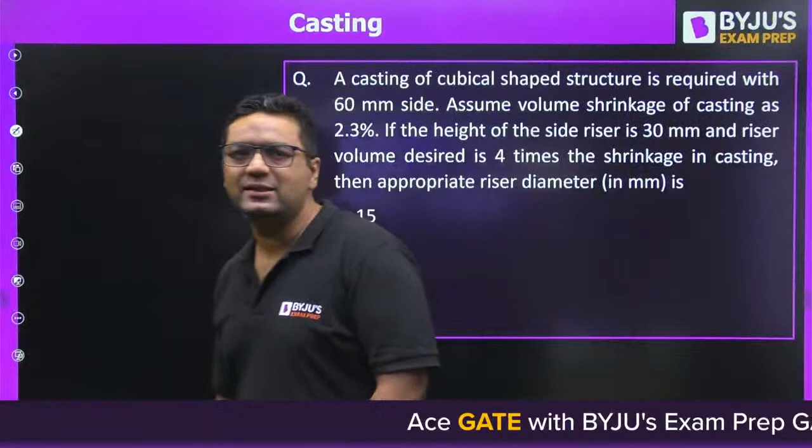So guys, this is the very first question in front of you from metal casting.

First of all, I would like to tell you what topics questions are asked from. In metal casting, questions come from riser design, gating system design, gating ratio, slush casting, centrifugal casting. All these are the topics from which numericals are framed. Otherwise for theory, there is no limit - you can have many theory questions possible.

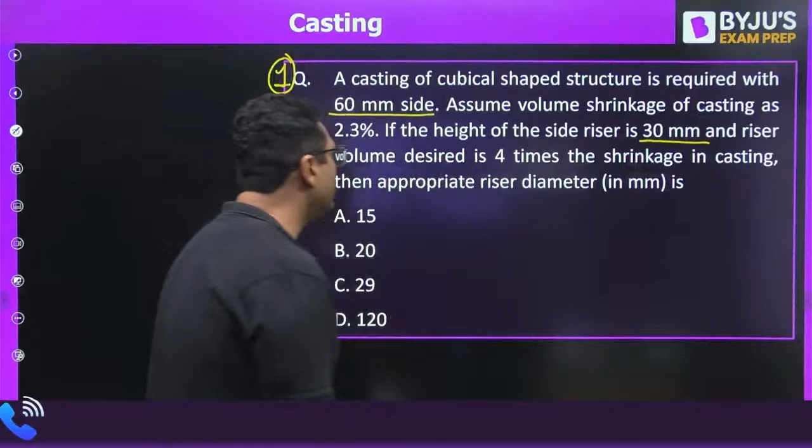So we are taking these numericals. A casting of cubical shape structure is required with 60 mm side - this is the size of casting. Assume volume shrinkage of casting as 2.3%. If the height of the side riser is 30 mm and riser volume is 4 times the shrinkage volume, then find out the appropriate riser diameter.

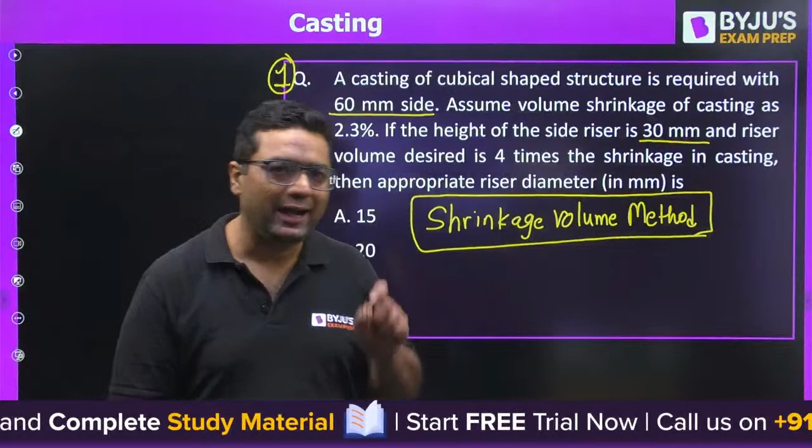So if you see this question, this is from the shrinkage volume method. If you remember, there are many methods for riser design - we have Caine's method, Chvorinov's method, shrinkage volume method. We also have some other methods like the modulus method. So out of these, this is the shrinkage volume method. And nowadays, if you see recent GATE papers, they are asking from either this, or also from one more method, the shape factor method. So for recent GATE, these are important topics.

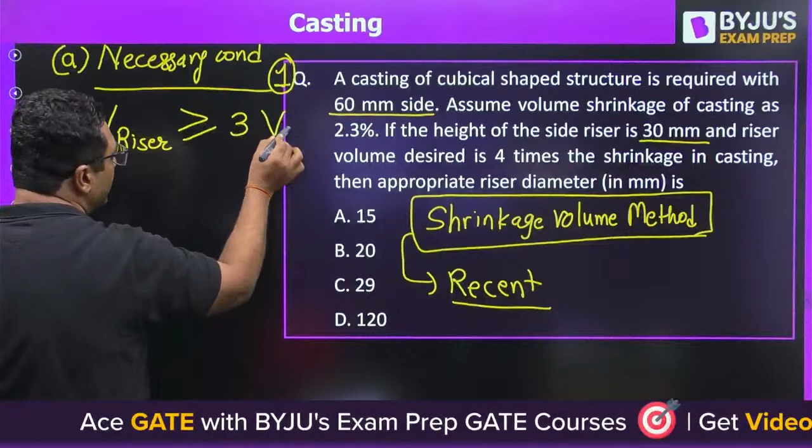So here we have two conditions. First condition is the necessary condition, for which they have given you something. We will say that the volume of riser is going to be more than or equal to 3 times the shrinkage volume. But here they have given 4 times, and 4 is more than 3, so that condition is satisfied.

So first of all, we need to find out the volume of casting. Since the casting is of cubical shape, it is going to be 60 cube. And if you want to find out the shrinkage volume, they have given what the shrinkage volume is.

Shrinkage volume is given as 2.3%, my dear. So you will say it is 2.3 divided by 100 into 60 cube. When you find out the shrinkage volume, I have calculated it as 4968 mm cube.

4968 mm cube. Now the necessary condition says the volume of riser, pi by 4 d square h, that should be more than or equal to, for our case it is not 3, it is 4. So it is going to be 4 into 4968. When you put this value, you will get the diameter because height is given in the question.

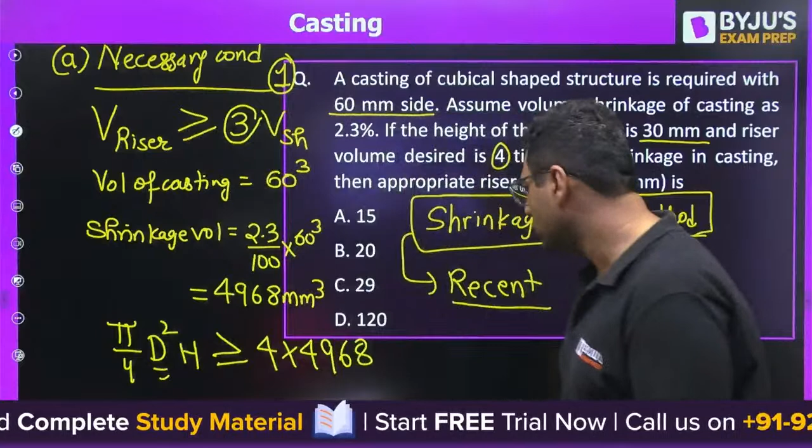Kiran has already solved it, 28.34 is the answer. So Kiran is saying answer is C. Good evening Kiran, so for the first question you are saying the answer to be C. Okay, let us see. So from here you will be getting, as you are saying, 28.34.

But I feel, Kiran, you forgot that we are also going to check with the sufficient condition. So you need to check with the sufficient condition. What is the sufficient condition? Sufficient condition is the modulus of riser should be more than or equal to the modulus of casting.

So when we talk about the modulus of riser, it is volume by surface area of riser should be more than or equal to volume by surface area of casting. So when you go for this, Kiran, tell me are you getting the same answer or will the answer change? You know volume of the riser is pi by 4 d square h. When we talk about surface area, it is pi by 4 d square.

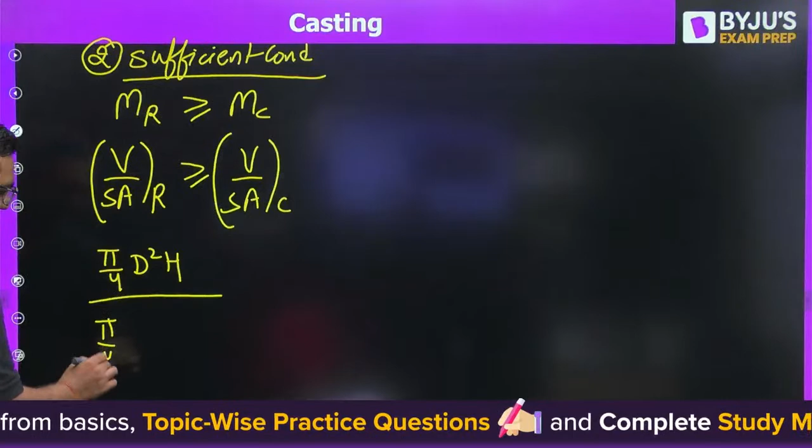Have they mentioned which type of riser it is? They are saying assume, okay is required. They are just saying the side riser. So for the side riser, we will be having 2 times pi by 4 d square plus pi d h. Height is given to us, and when you equate this with a cube by 6a square.

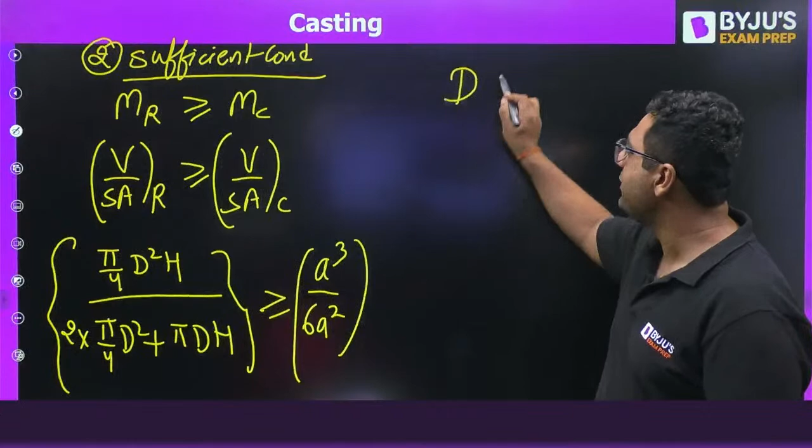Yes, very good, side is given to us. This time you will be getting diameter more than or equal to what? I feel it will be coming 120 mm. So you will be getting the answer to be 120 mm.

So yes, you know the sufficient condition requires 120. So if sufficient condition is saying 120 and the desired is saying 28, the answer is going to be 120, because both the conditions must be satisfied. So very good, Kiran, the answer for this question will be D.

Moving to the next question, guys. This is from slush casting. On slush casting, till date, questions have not been asked in the paper. So we have chances that a question will come this year from slush casting, because they have already asked from centrifugal casting. So the next question will be for slush casting.

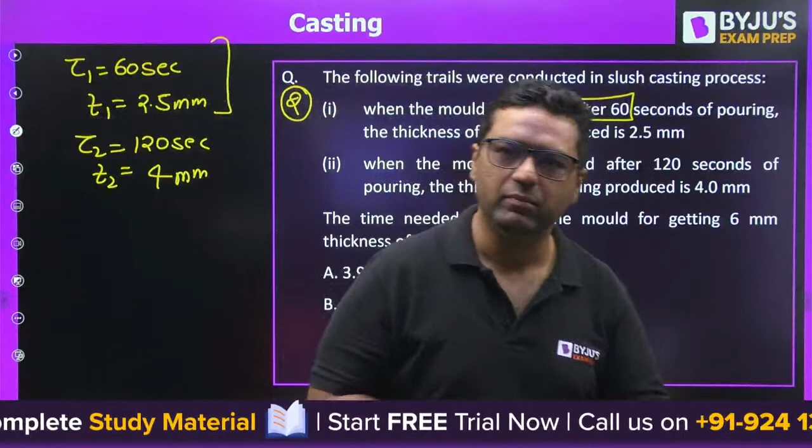So I told you, in slush casting, whenever we go by Chvorinov's law, solidification time is directly proportional to volume by surface area squared. You know volume by surface area is thickness for the thin section, so solidification time is directly proportional to thickness squared.

So you can write the thickness equals C1 square root of solidification time, I am showing it with tau s, plus C2. This is the equation where C1 and C2 are constants. You can also write this equation as T equals C1... here T is the thickness, C2 plus C1 root tau s.

So first of all, you will put the data of the first one. This is 2.5 thickness equals C2 plus C1 square root of 60 seconds. The second equation will be 4 mm thickness equals C2 plus C1 square root of 120 seconds. These two equations will give you C1 and C2.

After that, you put the thickness value into C1 root tau s plus C2. You need to find out the value of time for 6 mm thickness. So try to solve it, guys. Yes Kiran, are you trying this?

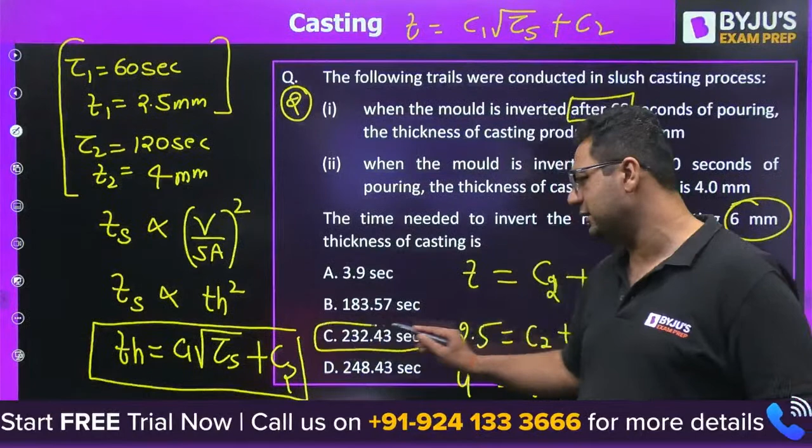Kiran is saying the answer this time is C, 232.43 seconds. I would like to say yes, your answer is correct. When you solve it, you will get C1 value equal to 0.4675, and C2 value equal to minus 1.1213. When you find the time, you will get 232 seconds. So the answer is correct, Kiran. C is the right answer.

Moving to question number 3, guys. This is from permeability number, from the permeability test. I feel you guys would very easily give the answer for this question. A sand specimen is made according to AFS standard and tested using the permeability test. I feel everybody is aware the permeability test is performed by taking a cylindrical specimen of diameter and height equal.

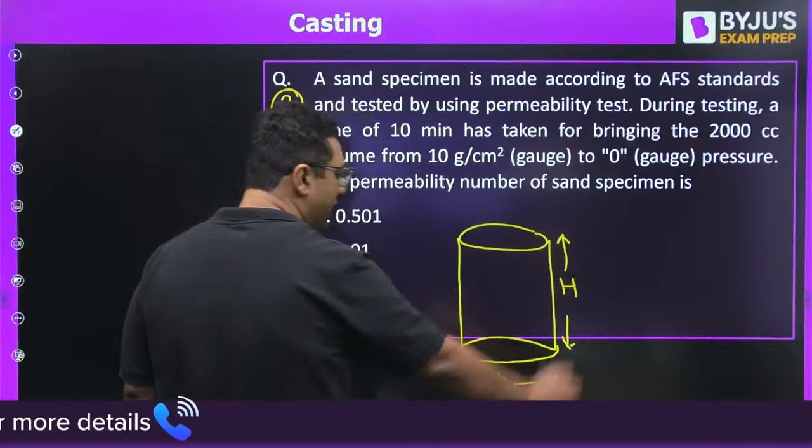Whenever we have this diameter and height equal, you allow air to flow at some pressure difference, and then you find the time required for the flow, because that gives you the proper idea of the permeability number. Is it clear, guys? Yes.

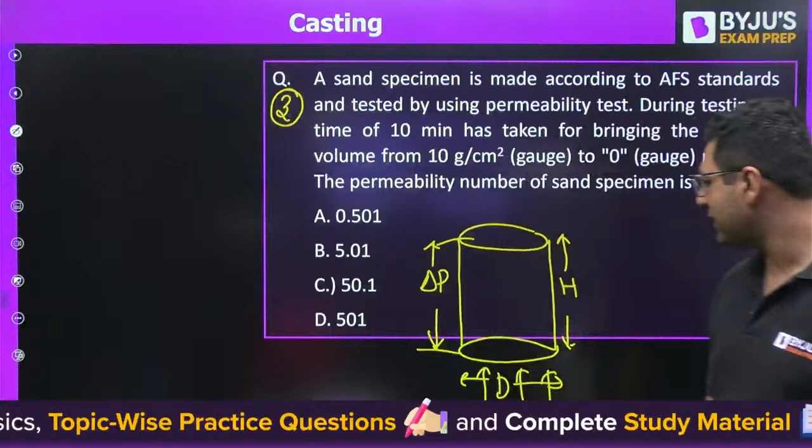Please solve this question, Kiran, I am expecting you will give the answer. They have given all the data. During testing, a time of 10 minutes was taken for bringing 2000 cubic centimeter of air. So volume of air is 2000 cubic centimeter, pressure difference is 10 gram per centimeter square. We need to find out the permeability number.

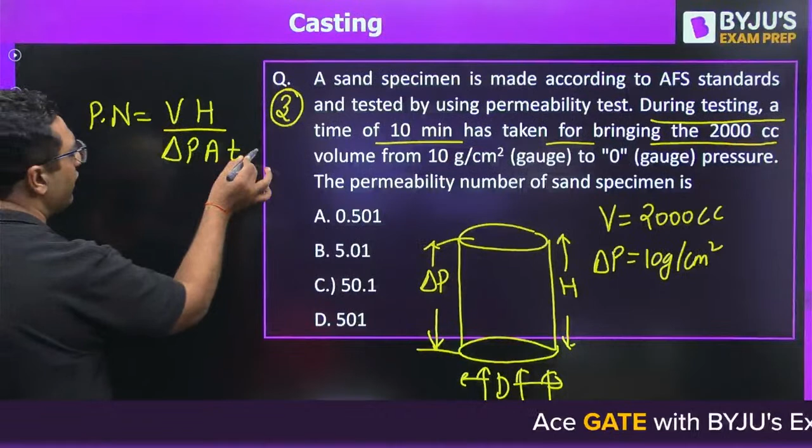The formula for permeability number is VH by delta P into A into T, where TF is the time required to fill the cavity. The diameter and height are 5.08 centimeters, so you can put the value directly because H and area will be found out from this value. So, volume of air is 2000, into height 5.08, divided by delta P 10, into area pi by 4 times 5.08 square, into time 10 minutes. You will get the answer.

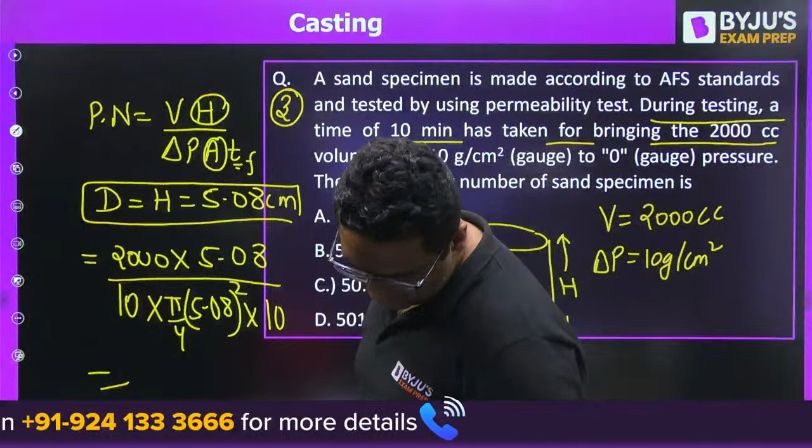Kiran is saying the answer is 5.01, and yes, I feel the answer is correct. 5.0127 is correct, you will get the answer to be 5.0127.

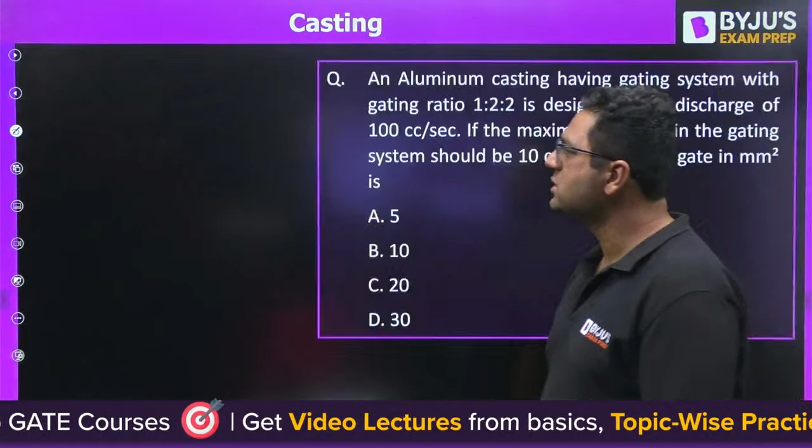So guys, my target is to take all the questions of different types. So you can see the first was on shrinkage volume method, second question was on slush casting, third question is on permeability number, so that you get a taste of all the types of questions here. So guys, we completed 3 questions. Today also we have 10 questions like yesterday we had.

Now question number 4 is in front of you. An aluminium casting - this is from gating ratio, using the concept of gating ratio and also the gating system design. So this is going to use two concepts simultaneously. This question says that an aluminium casting has a gating system with gating ratio. You know what is gating ratio - sprue area, runner area, in-gate area.

1:2:2 is designed for a discharge of 100 - discharge means A into V - 100 cubic centimeter per second. Maximum velocity in the gating system should be... so V maximum is given as 10 centimeter per second.

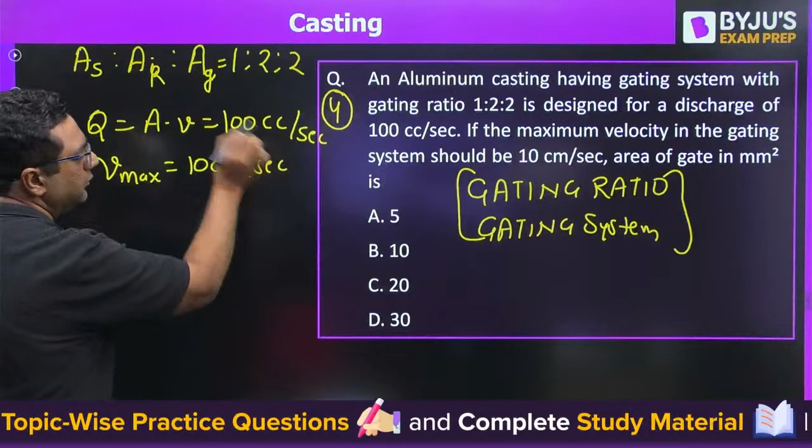You need to find out the area of the gate. It seems to be a very easy question, but let us see if you are able to give the answer. Okay, Kiran has given the answer as 20.

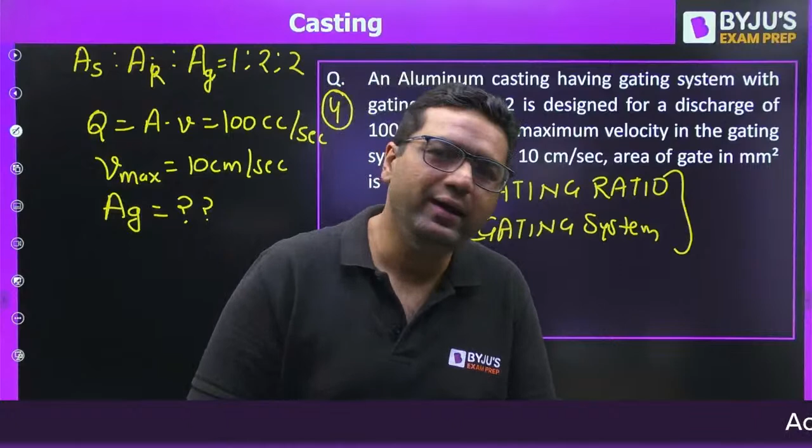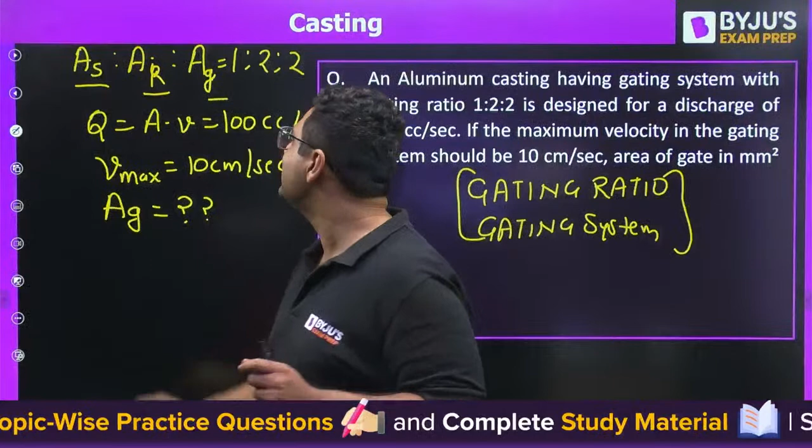And let us solve this question. So when we are talking about this question, the first challenge is to find out where the velocity will be maximum, whether at the sprue, at the runner, or at the in-gate. So my dear, you can see the area is minimum here. As the flow rate A into V is going to remain the same throughout, whatever comes out from the sprue, the same will go to the runner, the same will come from the in-gate. As all that flow rate is the same, it's very much fine that you will have maximum velocity for minimum area. So we are having minimum area at the sprue.

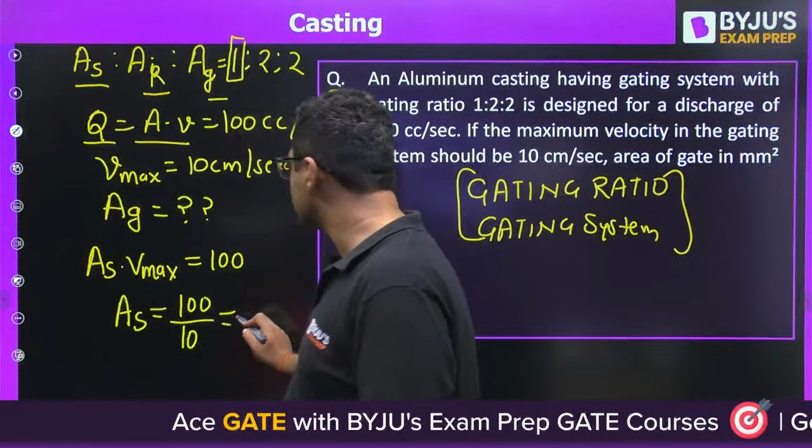So my dear, area of sprue into maximum velocity, that is 100. So you would be having the area of sprue as 100 divided by 10, which is 10 centimeter square. Then the area of in-gate will be 2 times the sprue area. Why? Because this is from the gating ratio. So the answer comes out to be 20. So 20 is the correct answer.

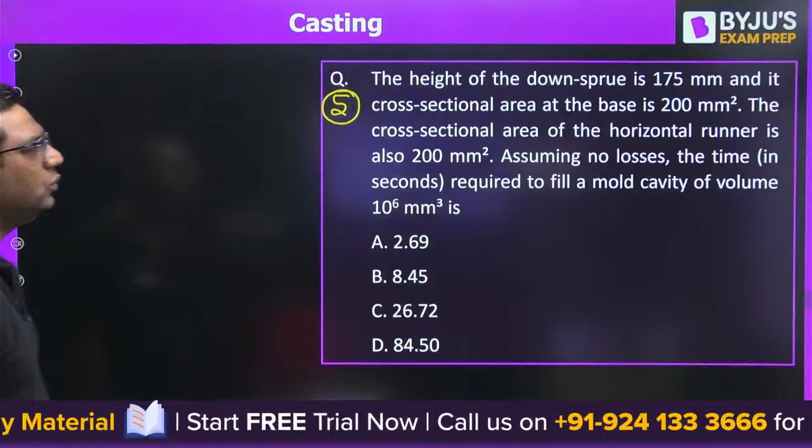Very good, dear. Moving to the next question, question number 5. So my dear, if you see, this question is related to the time required to fill the cavity from top and bottom gating system.

The height of the down sprue is 175, down sprue height is H1, 175 mm. And cross-sectional area at the base, meaning in-gate area, is 200 mm square. The cross-sectional area of the horizontal runner is also 200 mm square, but that is not required. Assume no loss. The time required to fill the cavity needs to be calculated, and the volume of the casting is 10 to the power 6 mm cube.

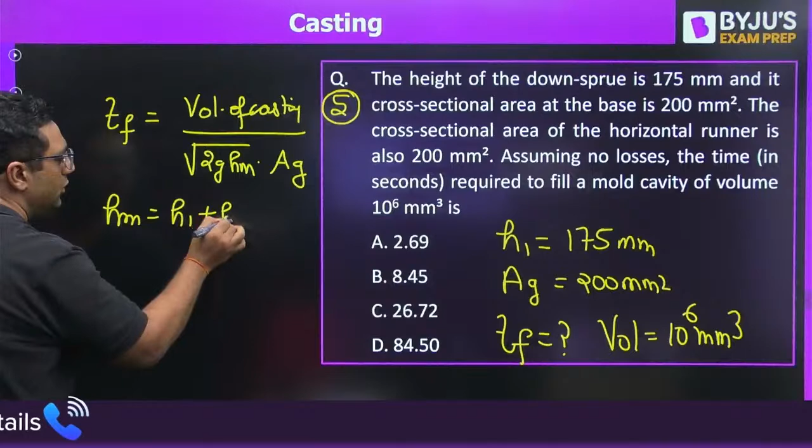It looks like a problem of top gating system as down sprue is given to us. So I feel you guys would be aware of the formula. Time required to fill the cavity by top gating system is volume of casting divided by root 2GHM times area of in-gate, where HM is the height of molten metal. And you know that HM is generally H1 plus H2. Actually it should be just H2 because the height of pouring basin is not given.

So H1 is 0. I feel now you can solve it and find out the time required to fill the cavity by top gating system. So just solve it, guys.

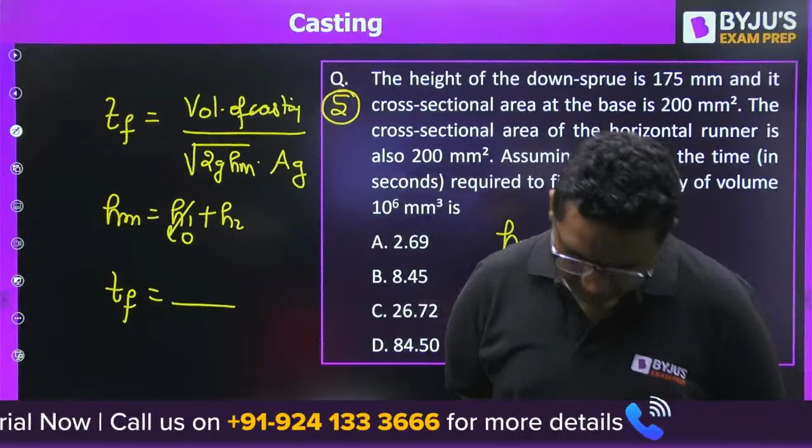Okay, so the answer is given by Kiran as 2.698. So yes, I would say the answer is correct. You will be getting the answer to be 2.698.

Here, the kind of mistake students are making is they are not putting the value of G correctly. If you can see, my dear, the volume is given in mm, 10 to the power 6 mm cube. So here you have area of in-gate as 200 mm square, so you need to put the value of G also in mm. So in mm it is 9810 into 175. You will get the answer to be 2.69. That mistake you need to be aware of.

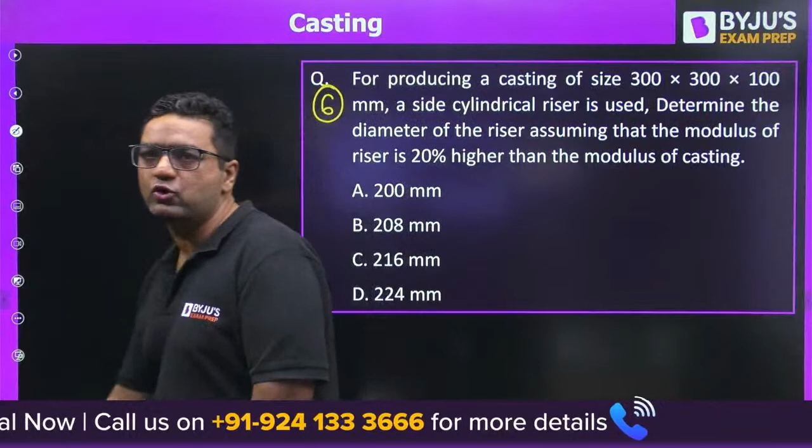For producing a casting of this size, a side cylindrical riser is used. Determine the diameter of the riser assuming the modulus of riser is 20% higher. This is a question of riser design, question of riser design, but by which method? By the modulus method.

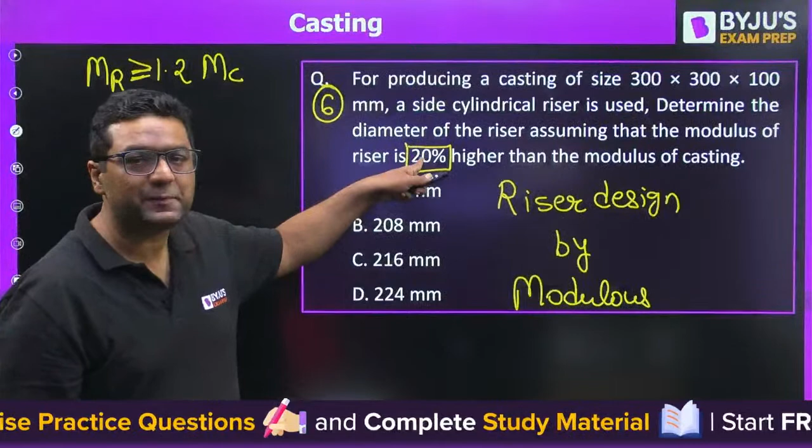So the modulus method says modulus of riser is 1.2 times modulus of casting. It is always more than or equal to. If they do not give this, you will use this only. But if they give 30% here, it will become 1.3. So this is always like this. Modulus of riser is volume of riser over area of riser. It is a side riser, more than or equal to 1.2 times volume of casting over area of casting.

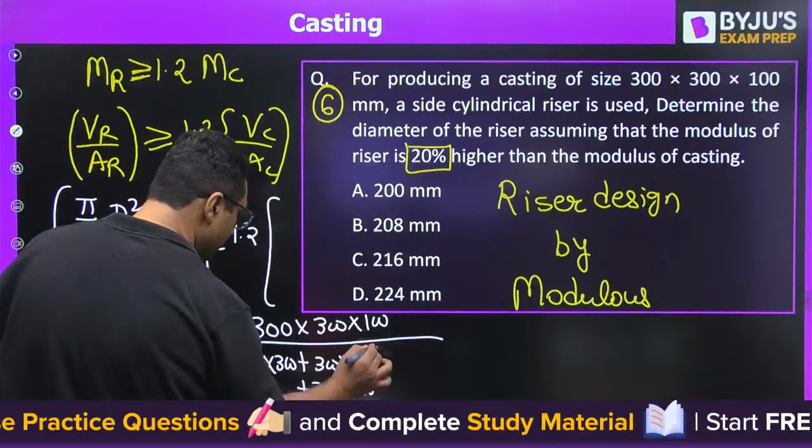So I feel you know that it is going to be... not 4, pi by 4. Pi by 4 d-square h divided by 2 into pi by 4 d-square plus pi d h. This is volume over surface area of riser, and it is 1.2 times. For casting we have 300 cross 300 cross 100 volume, surface area is 300 cross 300, 300 cross 100, 300 cross 100. This you need to do and you will get the answer very easily.

Okay, no issues, Vinit. Now are you fine? Kiran is saying the answer to be C. Okay, 216. Let me check it. So the answer is 216. Very good, C is correct.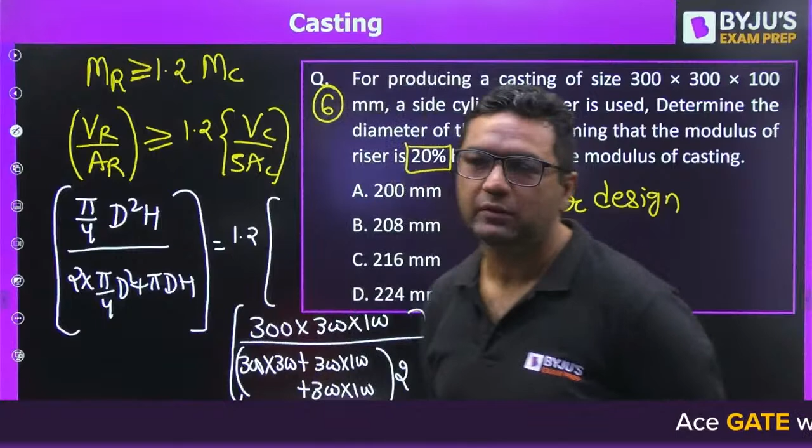So you need to find out the diameter of the riser. Very good, guys. They have mentioned determine the diameter of the riser assuming that the modulus of riser is this. So as it is a side riser, you will take diameter equals to height, because there is no other relation given. So we need to use it and you will get this to be 216 mm.

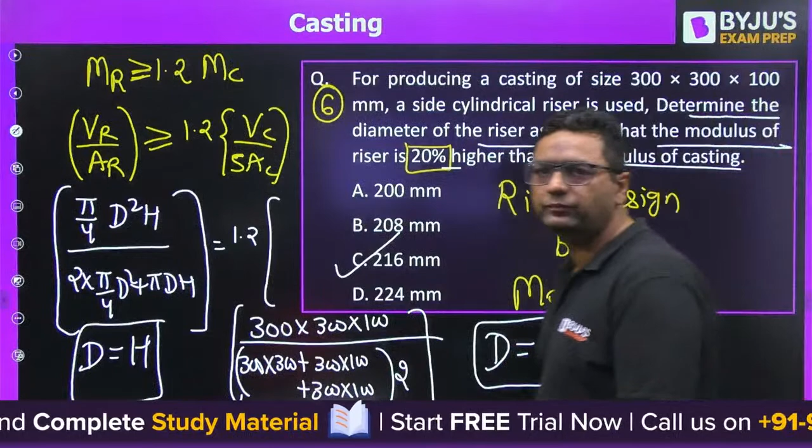Very good. Moving to question number 7. So guys, this 7th question is once again from riser design, but this is from Chvorinov's law. So every question is different. If you see in this session, I am taking all the topics covered with the questions. One topic, one question.

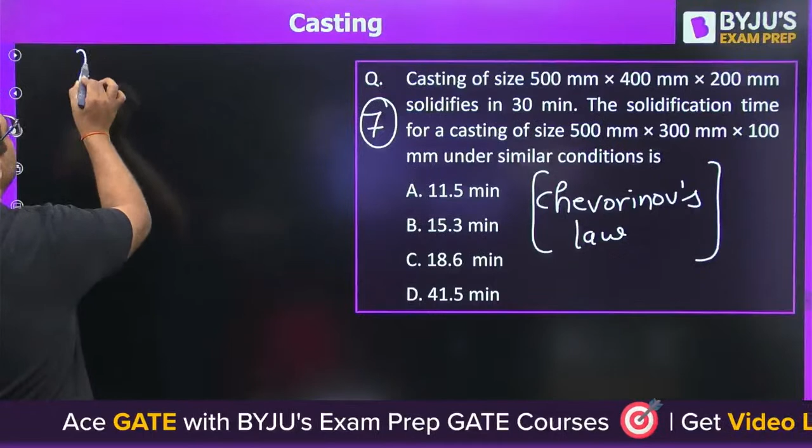Okay, so here we have casting of this size given. So if the casting size is given, you just need to apply this: solidification time of second casting divided by solidification time of first casting is the ratio of volume by surface area of second casting squared, divided by volume by surface area of first casting squared. This is what you need to do, guys.

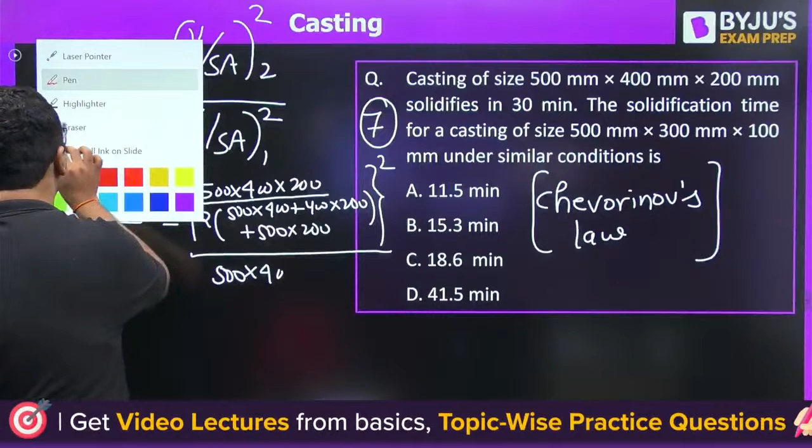So if you see, they have given many data points, TS2 needs to be calculated. TS1 is 30 minutes. Then volume of both the castings is 500 cross 400, 200. Surface area 500 cross 400. You will be having square of this, 500, 300, divided by 2 into... you will be getting the value of TS2.

Only calculations are there. This type of many questions have been asked.

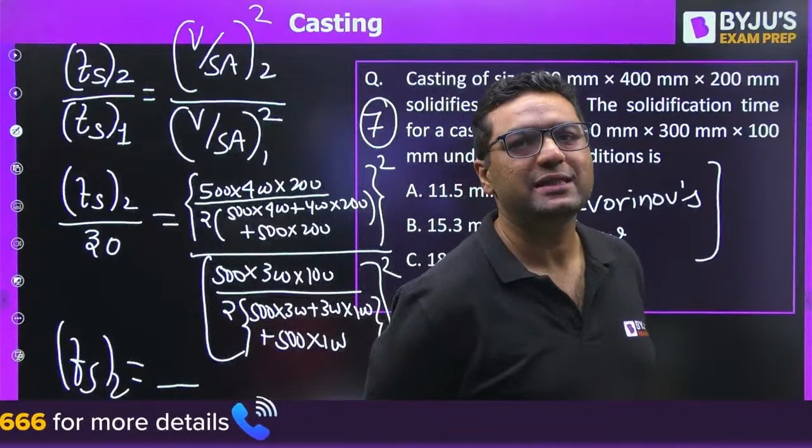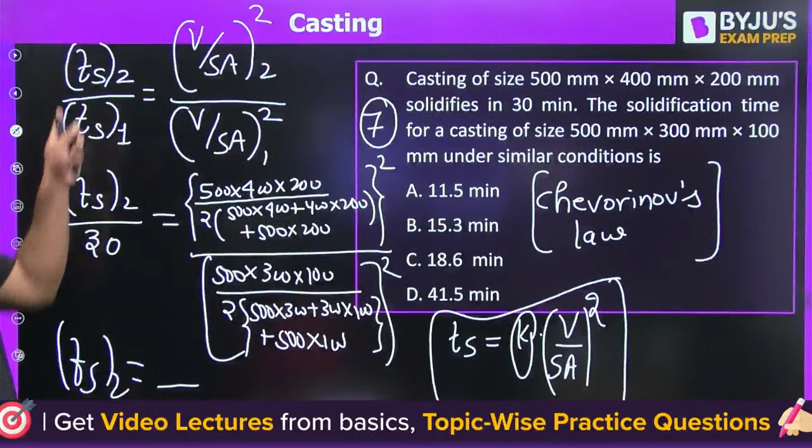Okay. Vineet, this is very simple, no? Solidification time is given as K into V by surface area squared. This is Chvorinov's law. K is the solidification factor, V is the volume, SA is the surface area. And if conditions are same, K will not change. So here for both the cases, conditions are the same. So K will remain the same.

So when you solve it, the answer you will be getting is 11.5 minutes. So Kiran has given the right answer. It is 11.5 minutes.

Moving to question number 8, guys. This is for, my dear, parting line gating system. This is the question on parting line gating system. So all the questions are different, I am not repeating any question.

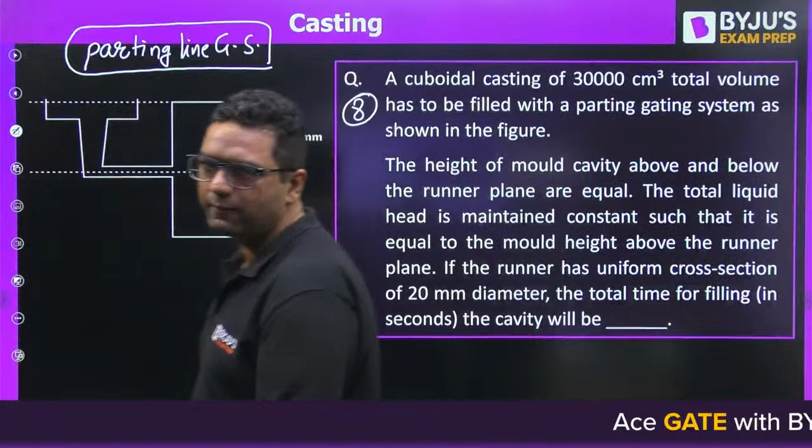Yes, definitely Vineet, it will have been given again. So guys, this is a wonderful question which we are going to do, and this type of question we can expect in the GATE exam. This is question number 8. After this we have 2 more questions.

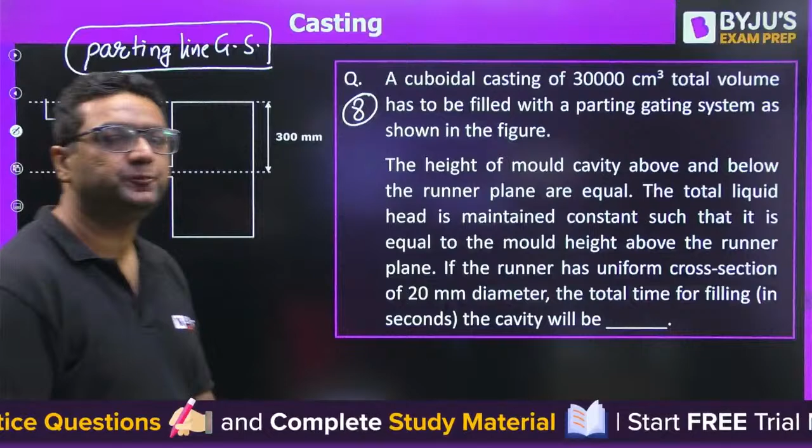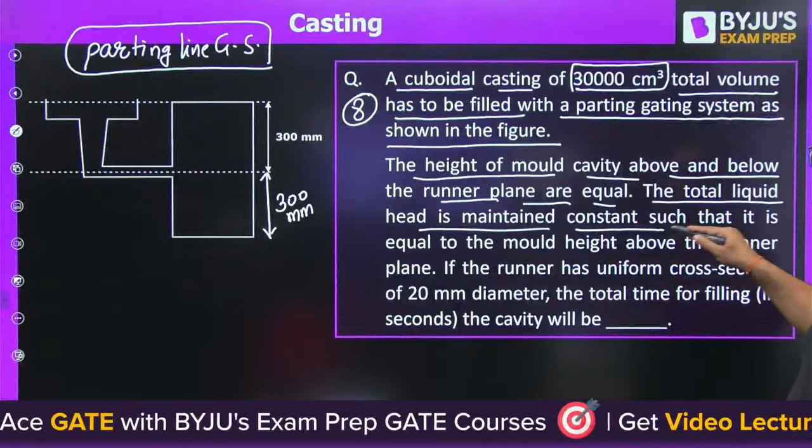I will try to give you one bonus question also. So if you see this question, it says a cuboidal casting of 30,000 cubic centimeters total volume has to be filled with a parting gating system as shown in the figure. The height of the mold cavity above and below the runner plane are equal, so this height and this height are equal. Then the total liquid head is maintained constant such that it is equal to the mold height above the runner, so the height of molten metal is also the same.

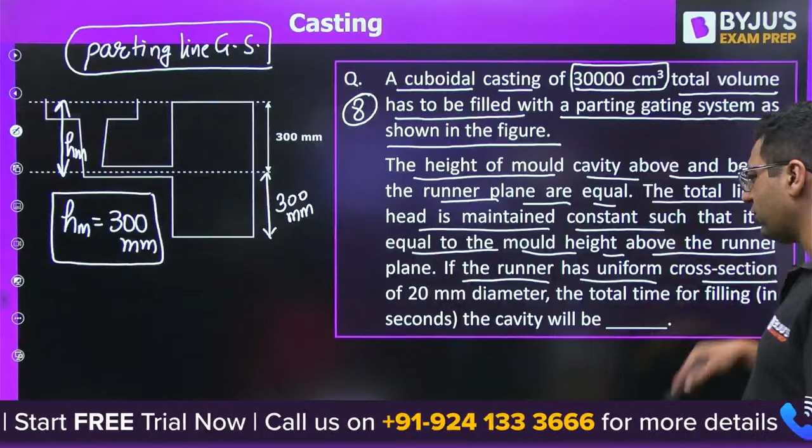Okay, guys. Okay, I feel you have given the answer. Let us see. If the runner has uniform cross section of 20 mm diameter, the total time for filling the cavity is...

Okay, Kiran, let us see.

I would like to tell you guys, these are the 2 parts, A and B. When the molten metal comes inside, B will be filled by the top gating system because molten metal is coming from the top. And A will be filled by the bottom gating system because A is filled from the bottom.

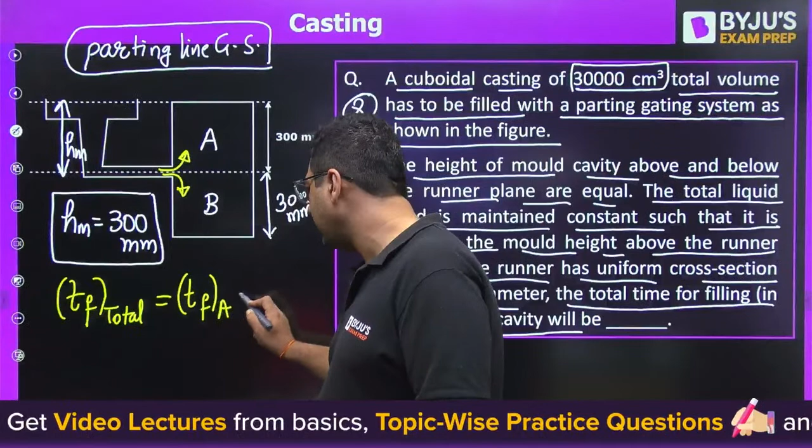So if you want to find the total time required to fill the cavity, it will equal the time required to fill cavity A plus the time required to fill cavity B. For bottom and top gating, formulas are different. But whenever we have the heights to be equal, which heights? This height and this height.

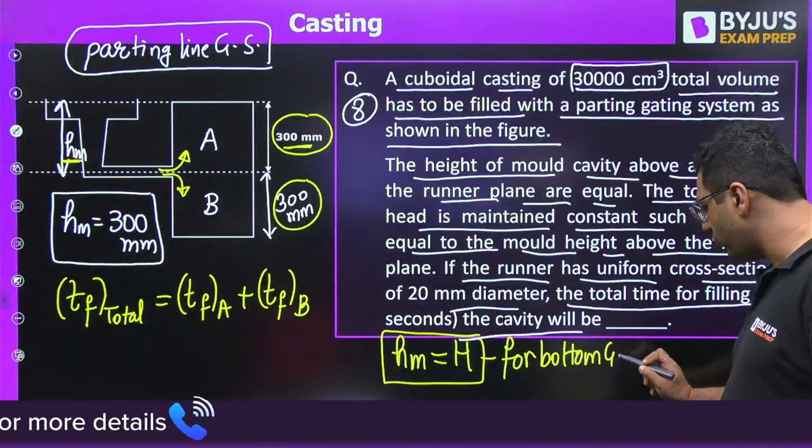If height of molten metal equals the height of cavity for bottom gating system, we are having this height and this height equal. For such cases, the time required to fill the cavity by bottom gating system comes out to be 2 times the time required to fill the cavity by top gating system. Obviously this will be calculated by top gating system, and this will be filled by bottom gating system. But this bottom is going to equal 2 times of top.

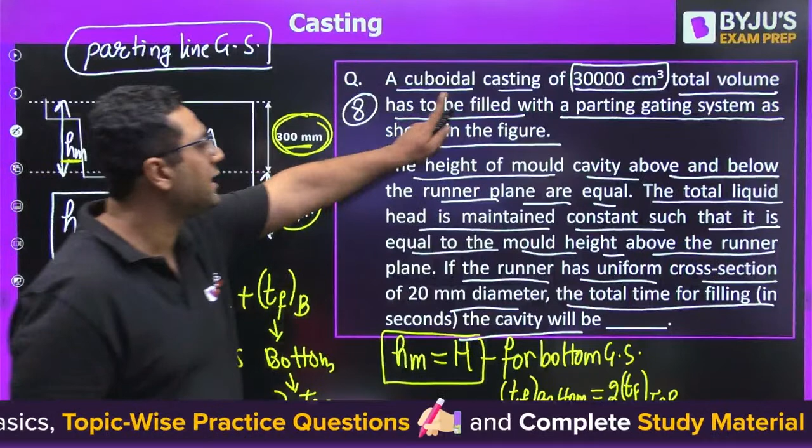If you see, they are saying a cuboidal casting of this total volume has to be filled. Total volume is 30,000 and as heights are equal, you can say 15,000 volume will be here, 15,000 volume will be here. So volumes are equal. So obviously, if you calculate the time required for this cavity, for A you just need to double that.

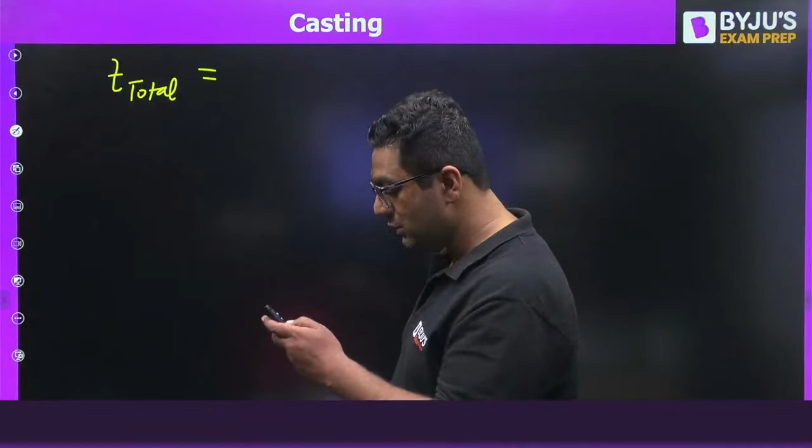So the answer will be coming out to what? The time required to fill the cavity in total equals what? First of all you will say it is 2 times of top here and 1 time of top. Why will they be same? Because the volumes are same for both and the gate area is also same for both, so the velocity of the fluid will also be same for both.

When we go to take this, you can write this directly as we are filling it separately. Let us say TF of B plus 2 times TF of B, it will be 3 times TF of B. So I feel you got the mistake. Now we are going to see it is 3 times.

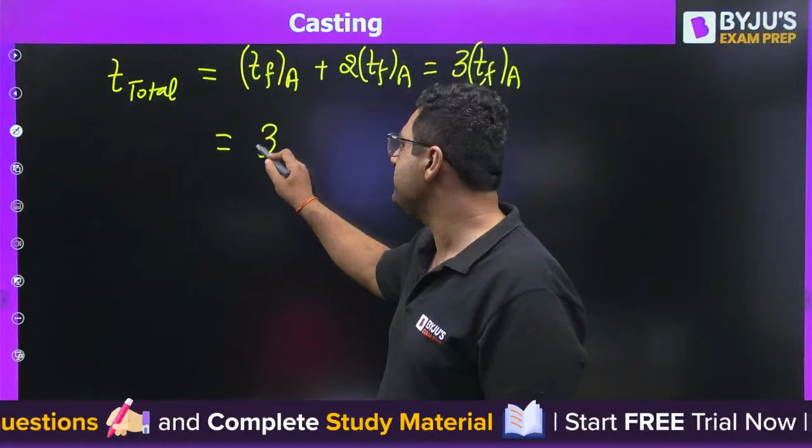This is going to be the volume of the casting, and then it is area of ingate into the velocity. So when you put this value, I feel now you can solve the answer.

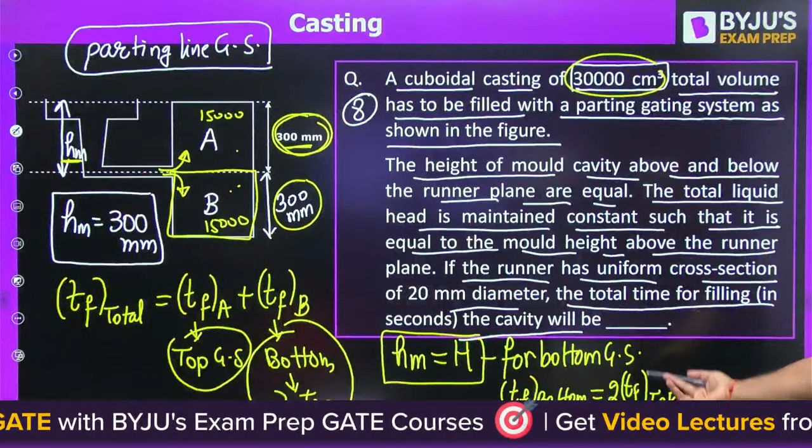They have already mentioned, what is the question? What does the question say? They have given everything. 30,000 total volume has to be filled, and they have given the height. You just need to apply the formula now.

And when you solve it, what will be the answer you get? The answer will be coming out to be what for this? It will be coming out to 59.04. Is it correct? Yes, 59.04 will be the right answer, 59.04 seconds.

Is it clear for everyone, guys? This is question number 8. Moving to question number 9 now.

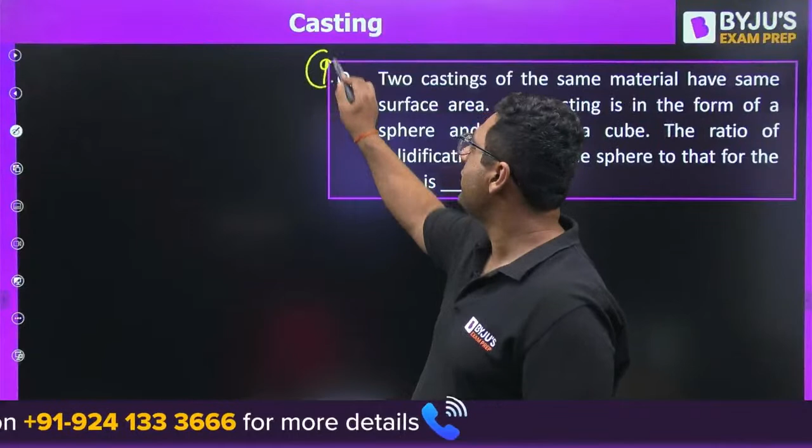2 castings of the same material have the same surface area, so surface area of 1 equals surface area of 2. One casting is in the form of a sphere, the other is in the form of a cube. For sphere, surface area is 4 pi r square. For cube, it is 6a square.

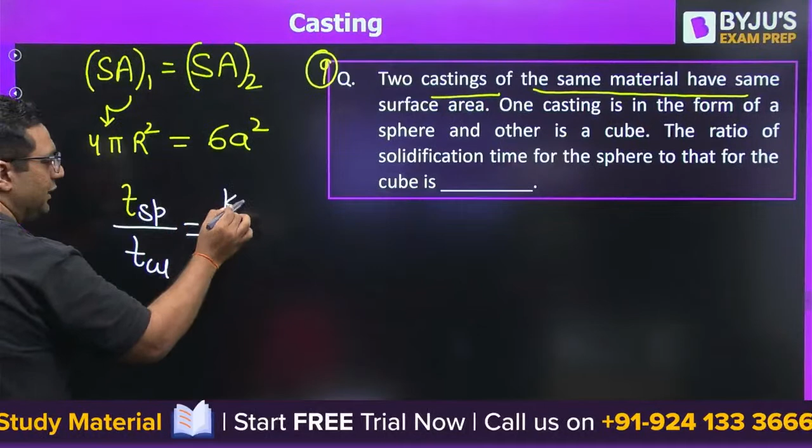Then they are saying the ratio of solidification time for sphere to that of cube. Solidification time of sphere to that of cube is K into volume by surface area of sphere, whole square, over K into volume by surface area of cube, whole square. The K's will get cancelled out. You need to find the ratio, and you are given the radius and everything.

So this ratio is given to us. You just need to say what is volume over volume. Surface areas are given equal, so they will get cancelled out. So volume of sphere is 4 by 3 pi r cube, and volume of cube is a cube. So you know the ratio of r by a from here.

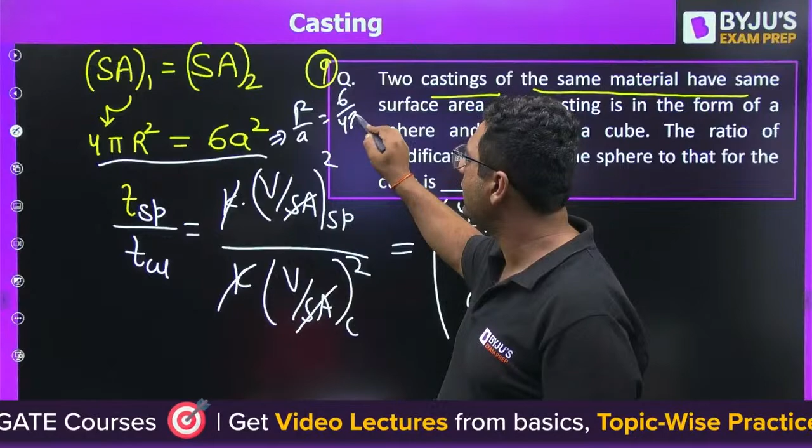You can find r by a equals 6 by 4 pi, so r by a is 6 by 4 pi to the power 1 by 2. You just need to put the value, 4 by 3 pi, obviously squared will be there. 4 by 3 pi, r by a is 6 by 4 pi to the power 1 by 2, and we are going to have power 3 and 2, 6. So you will solve this and get the answer.

So what would be the answer for this question, Kiran? Vineet. After this, we have 2 more questions.

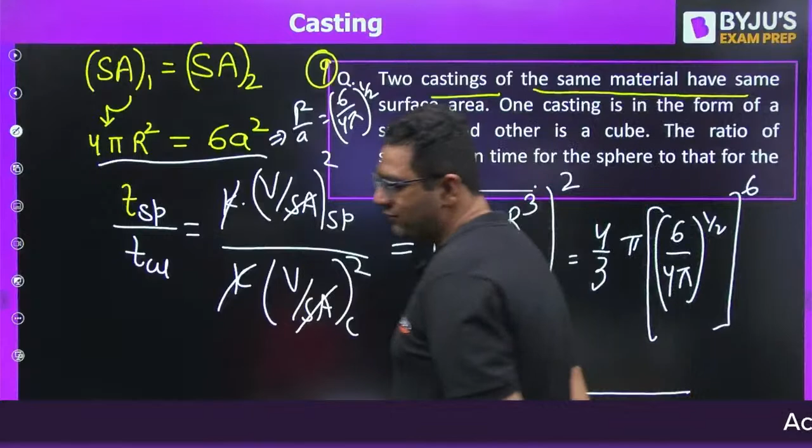Kiran is saying 1.909. 1.909 is the perfectly correct answer. Very good. 1.909, this is the right answer.

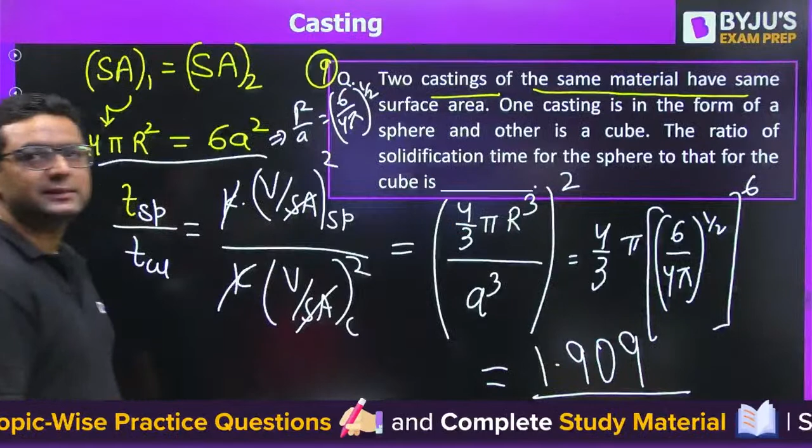So moving ahead. Very good, Vineet. Moving ahead to question number 10.

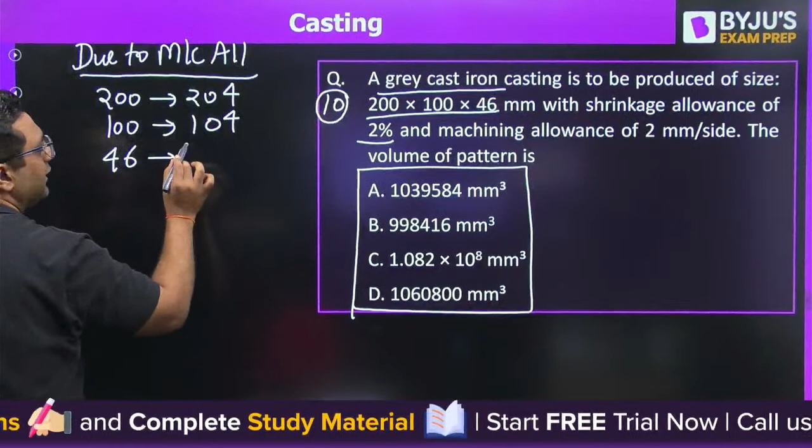The volume of the pattern will be calculated. Due to machining allowance, 200 will become 204, 100 will become 104, 46 will become 50, because on every side you just need to add 2 mm. So this is the desired size because of the machining allowance.

And shrinkage allowance is given as 2%. So generally whenever students see grey cast iron, they feel that the volume of pattern will be smaller than the volume of casting because cast iron shows different behavior. But I would like to say cast iron is not showing that kind of different behavior. Whenever we are talking about cast iron, we are talking about solidification.

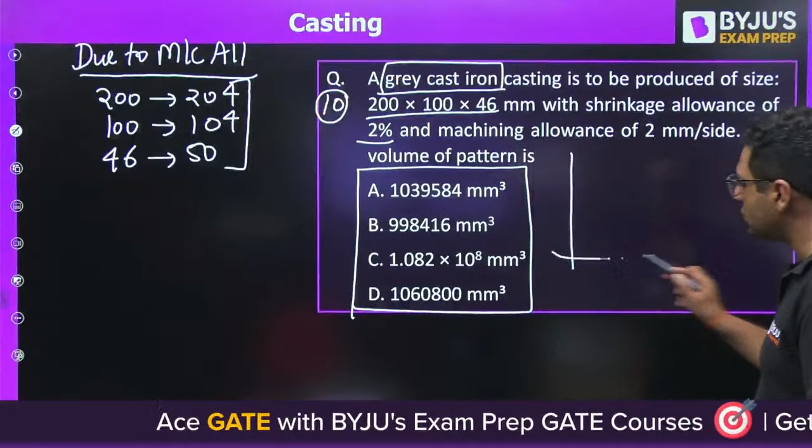This is the cooling curve. For this stage, this is called liquid shrinkage, this is solidification shrinkage, and this is solid shrinkage. Allowance is provided for this third stage, where grey cast iron shows the same behavior as other materials. But in this other phase, cast iron shows different behavior - it expands.

So when we are talking about shrinkage allowance, this is not going to be affected. This will be affected for the riser design. In grey cast iron, you may not require a riser because whatever shrinks, the same amount of expansion happens.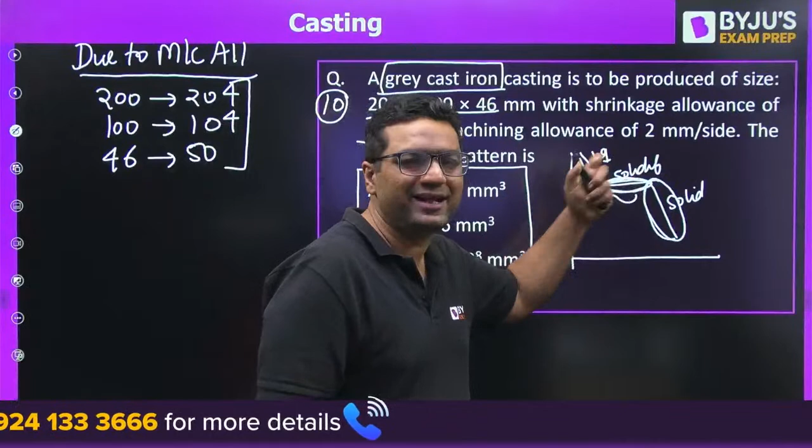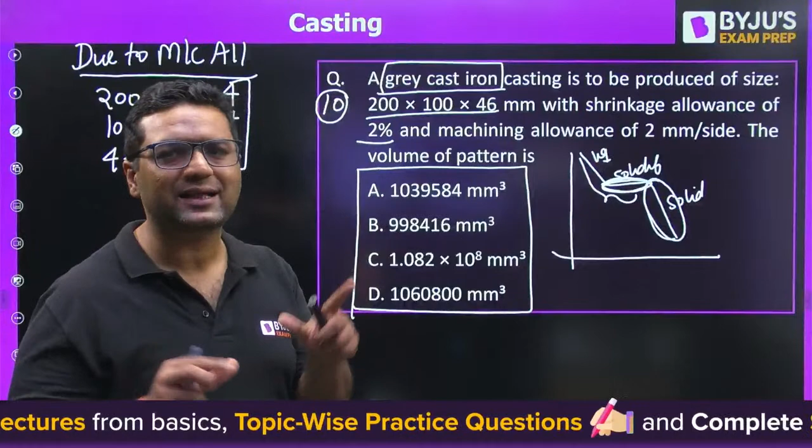There's a question Varun is asking: sir, which one is better, MTech in design or MS in IIT Delhi Mechanical? Please inform more about MS in Mechanical at IIT Delhi. Obviously, when we are talking about MS and MTech, I have taken a video where I clearly told you in 5 minutes the difference between MS and MTech. Go for that video, or I will share it in my Telegram channel after this class. It's available on the same channel, there in 5 minutes I explained the difference. But otherwise, students generally prefer MTech rather than MS because MS is slightly more time consuming, it is more research based. So you can watch that session. But if you have the same option, MTech in design is always better than MS, design is better than MS. But it should be the same college, I am telling you.

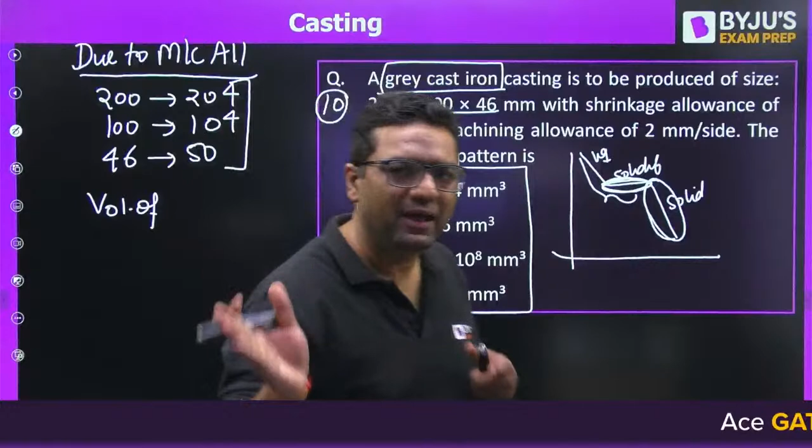So guys, when you will solve this, you will find volume of pattern. So grey cast iron also shows the same behavior as far as shrinkage allowance is concerned. The behavior is different from the riser point of view, because for these two stages of shrinkage, the riser provides the molten metal.

So when you will say volume of pattern to the volume of casting, when we will find this - the volume of the pattern is what they are asking. So you know that when you are going to talk about the volume of pattern, you will be saying obviously 2%. So this is going to be the size. So you are going to do 1.02 volume of pattern to volume of casting. What will this ratio be? This ratio will be 1.02.

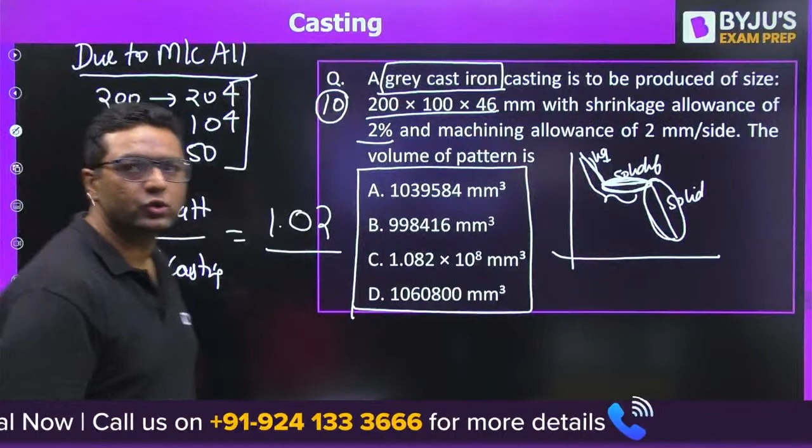So you need to do this, is it clear? So when you will be doing this, you will get the volume of pattern. So for volume of casting, you need to have this size first of all, after that allowance will be provided on these sizes. So when you have 204, that will be multiplied by 1.02, that will give you this size. And then when you find out, you will get the answer to be 1060800. I feel this will be the answer you will get.

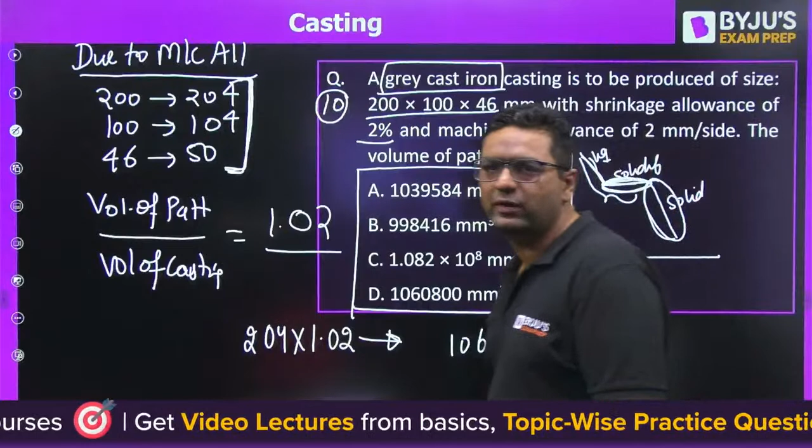Okay, are you getting C or D? Kiran, are you getting C or D? Please tell me that. I am once again telling you if you have any confusion.

This is the size for machining allowance. After that, this 204 needs to be multiplied by 1.02. You will get one size. 104 also like this, 50 also like this. Then you will be getting the answer.

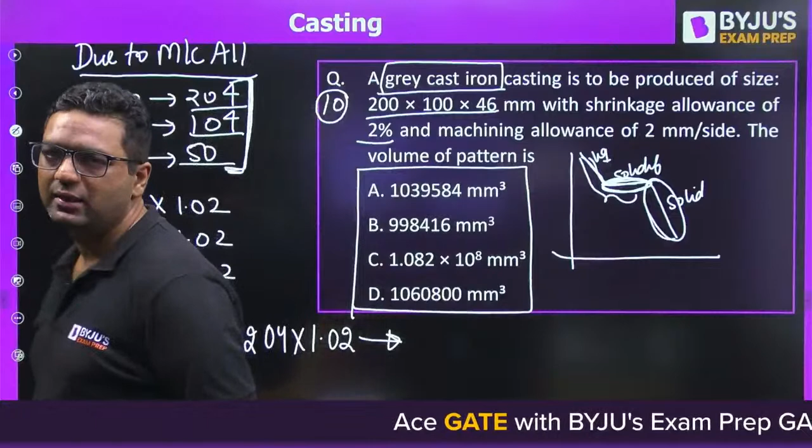So what are you getting, guys? Dear, A would be coming if you are not considering the machining allowance. A will be coming if you will not consider the machining allowance, because here machining allowance is also given, na?

Yes. Kiran, are we getting C or D? Are we getting C or D? Please tell me.

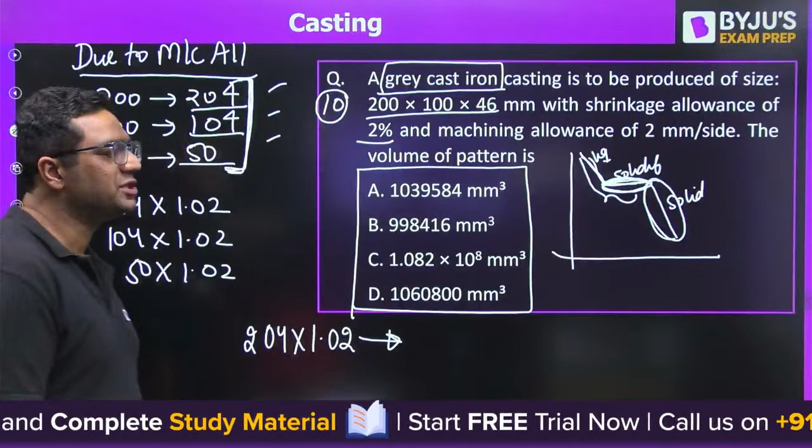So whenever you have this, first you will go for machining allowance, then you will go for shrinkage allowance. Okay, first machining, then shrinkage. C only. Okay, C is the right answer.

So we are moving ahead, guys, and for those who still have doubt in this question, I am telling you there was a question in 2008 and 2016 where they have given grey cast iron and done like this only in the GATE exam. Because whatever the difference in grey cast iron is in this stage, and shrinkage allowance is provided for this stage, so the answer will not be affected.

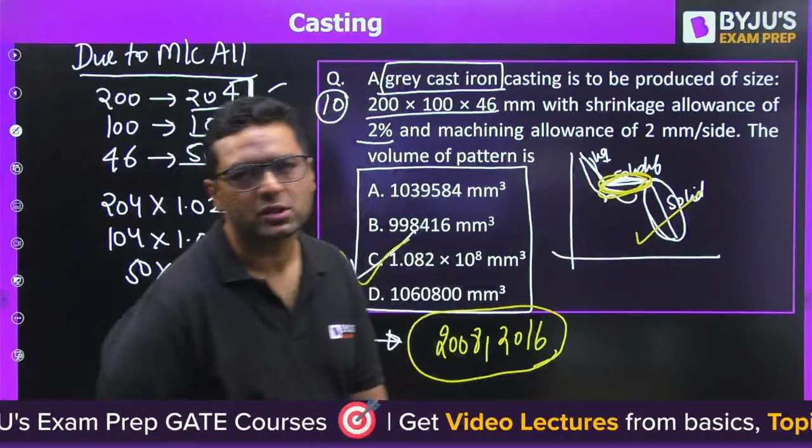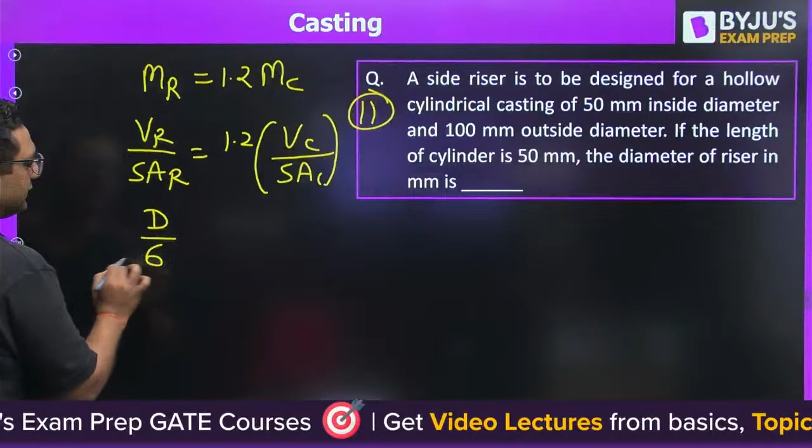Okay, I feel this will be d by 6, into 1.2. Volume of casting is pi by 4 times 100 square minus 50 square into height, divided by 2 into pi by 4 plus pi d mean into height.

Here this is the confusion. Pi dm into h you will take and you will get the diameter of riser.

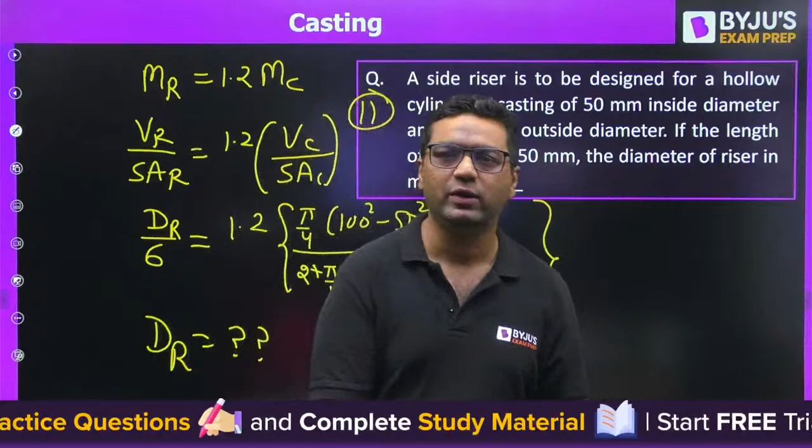So here we will take mean diameter. We will take mean diameter for the second area, and I feel you can solve it and get the answer.

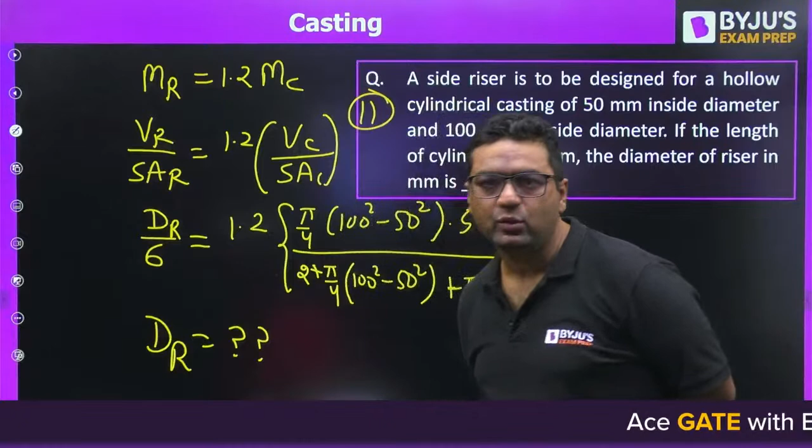Kiran is saying the answer to be 50. Kiran, check it once again. Some mistakes I feel you are doing, because I feel the answer will be 90. Yes, 90 is correct.